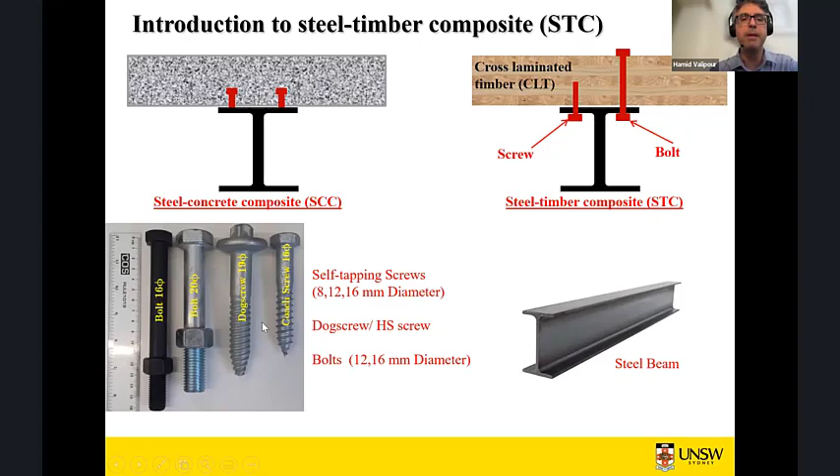Initially, we did some assessment of the advantages or benefits of this steel timber composite system compared to other conventional methods of construction, more specifically reinforced concrete and steel concrete composite.

Apart from that, reduced cost of substrate foundation, particularly if building on soft or problematic soil, is another benefit of this system. The last one is upgrading or rooftop solutions, or adding stories on top of existing buildings, which are becoming more popular and common, especially in densely populated urban areas - another advantage of this steel timber composite system.

We did some analysis on the sustainability achievement of steel timber compared to conventional systems. 5-story, 10-story, and 15-story hypothetical buildings were considered. We designed them as reinforced concrete, as steel concrete composite, and as steel timber, and did a life cycle analysis to see the carbon footprint - the amount of CO2 in kilograms emitted per square meter of each building.

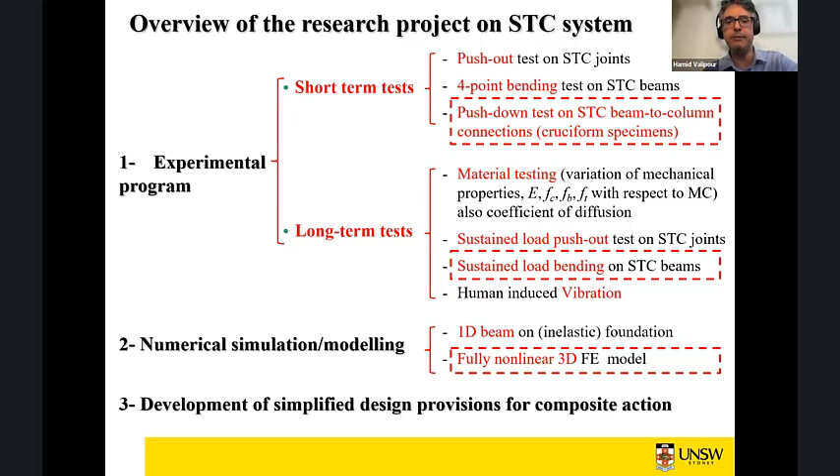Also, we did some analysis on the vibration behavior of these steel timber composite systems to see whether we can satisfy the existing design requirements for conventional residential buildings and offices when it comes to human-induced vibration design requirements. Now, in the next 10 minutes or so, I will take you through each one of these tests, highlight the importance of each one and why we did it, and what the outcomes are and how we can use these results for practical analysis and design of steel timber composite systems.

The first one is what we call the push-out test. So we have a steel profile at the middle, then it's connected to 2 CLT panels on the side. The connection, as I indicated earlier, could be conventional mechanical fasteners like bolts and screws or something else. What that something else is, I can show you an example of other alternatives for a shear connection between timber and steel in the next few minutes.

And then we apply a load, we push this down, and then we measure the load versus relative displacement of these 2 components, timber versus steel, and that's the type of results we get, what we call load versus slip. This would shed some light on the performance of the connections, which have a critical role in design of any composite floors, including steel timber composite floors. Of course, we are interested in stiffness, strength, and also ductility of these connections, especially under extreme loading conditions, when the shear connections are pushed to their limit and beyond.

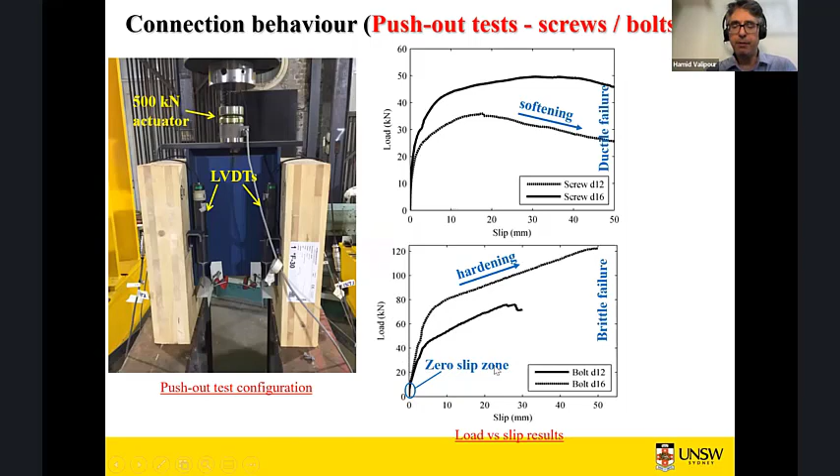In terms of strengths, it's completely opposite - bolts have higher strength than conventional screws, and the screws I'm talking about are conventional coach screws that you can get off the shelf, manufactured from mild steel, 4.6 steel with yield strengths of around 240. In terms of stiffness, again, screws initially have higher stiffness, but bolts have a slightly higher stiffness after the first initial slip. If the bolts could be tightened to mobilize friction, definitely the initial slip would be much smaller.

Again, we did some bending tests, 4-point bending tests, to see how the results stack up when we look at the load versus midspan deflection. So this is a bare steel beam, the dot line, and the solid line is a steel timber composite beam. You can see there is a 50% strength enhancement when we are using coach screws 16 millimeter, 250 millimeter apart, which is quite reasonable. In terms of stiffness, the initial stiffness of this composite system is around 50% higher than the bare steel beam.

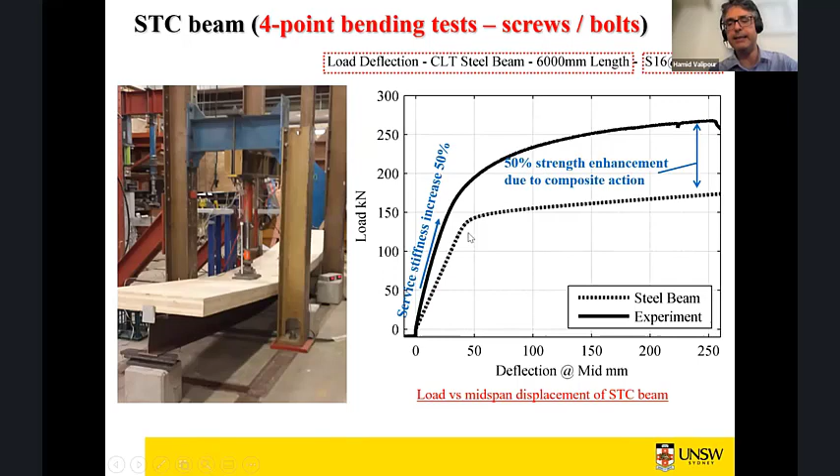This is another type of connection. As I said, one critical factor in design of steel timber composite floors is the stiffness of the shear connectors and the serviceability design requirements related to long-term and short-term deflections. The stiffer the connection, the better the performance of these steel timber composite floors would be. Unfortunately, bolts and screws are not really the best performer when it comes to the shear connection between timber and steel. The idea we had is to replace conventional shear connectors with something which is easier to install, considering all the constraints in the construction side - it could be installed from the top rather than the bottom, which makes it very difficult in real construction.

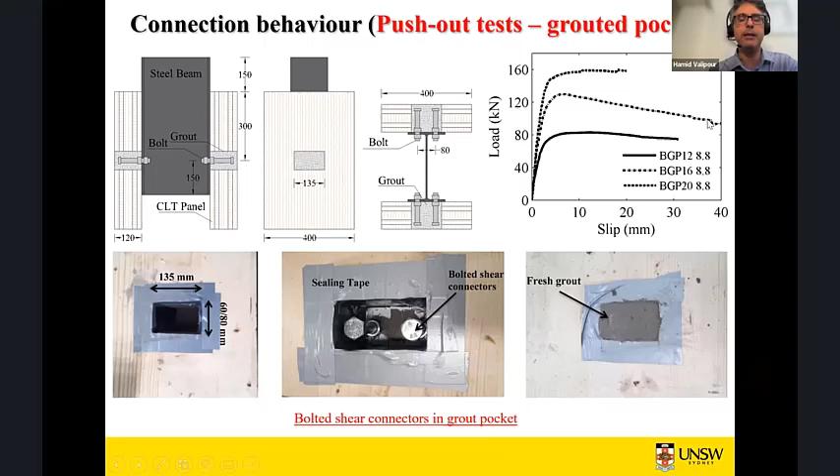And we came up with this idea. So we cut a square hole, and then we installed the stud or bolted shear connectors on top of the flange. We fill these pockets with cementitious grout, and we got very good connections with very good stiffness, as you can see from the initial slope of these graphs, very high strength, as well as very good ductility. So we got a fairly good connection in terms of stiffness, strength, and ductility, which are all important factors from a structural design point of view.

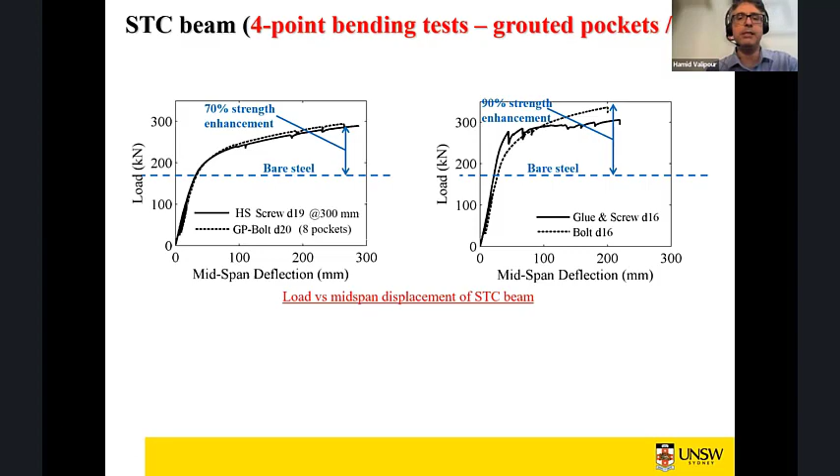Again, we tested a variety of different connections to see how far we can push this system to the limit. The limit, when we have near full composite action, could only be achieved by gluing or using adhesives. When we glued the CLT slab to steel beams and also used coach screws to achieve some level of ductility, the highest strength enhancement we got was close to 90%. That means a bare steel strength could be doubled by developing composite action. We're talking about CLT slabs around 100-120 millimeters thick, and steel beams around 310 UB size. So you can imagine how much strength and stiffness enhancement we can achieve.

The next part was to compare steel-concrete and steel-timber, to see whether steel-timber really performs on par with steel-concrete. That's what we tested, again with an 800 millimeter wide slab. Once we had a reinforced concrete slab, and then a second time we had a CLT slab, both connected to this 310 UB32, and we did the load deflection testing.

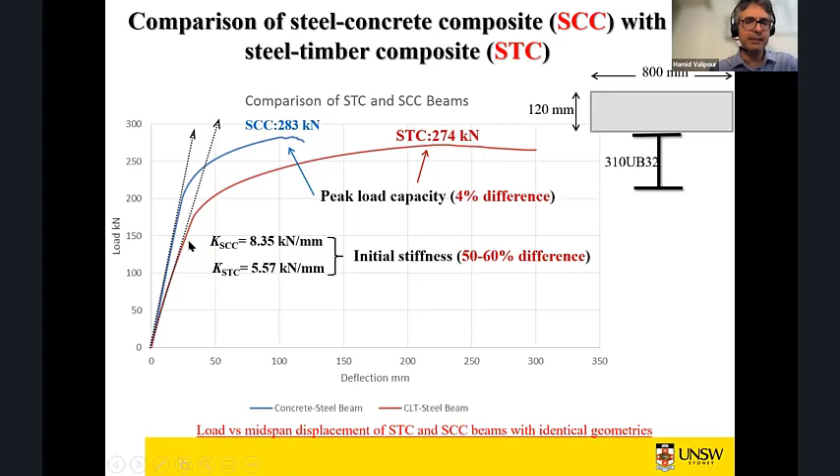We just tested these beams, and these are the results. The red one is basically steel-timber, and the blue one is steel-concrete. You see, in terms of ultimate strength, there is not much difference. In terms of ductility, in fact, steel-timber, interestingly, is more ductile than steel-concrete. In terms of stiffness, due to the lower elastic modulus of timber compared to concrete, steel-timber composite has a slightly lower stiffness - around 50-60% - but still definitely much higher than a bare steel beam.

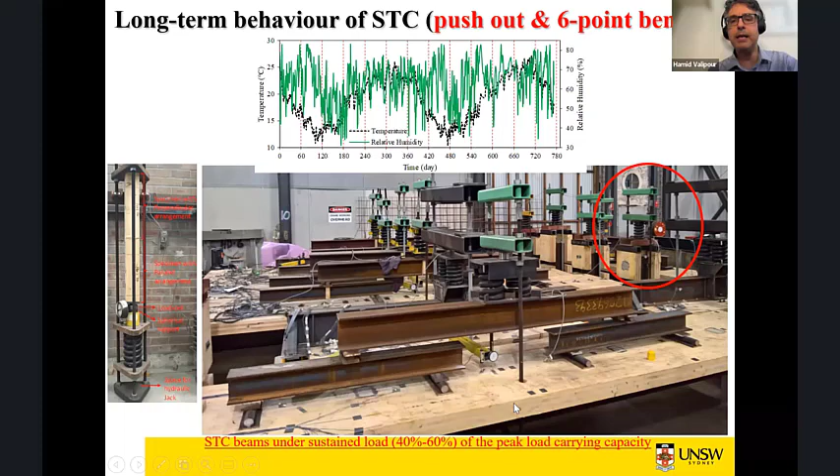These specimens, 6 meters long, were under load for nearly 2 years. We measured the relative humidity in the lab environment, temperature, and from there we measured the midspan deflections and slope, a variety of different parameters measured during the test, and that data was used to evaluate long-term performance. The simple graph we get out of this is something like this: we have midspan deflection, expressed as a percentage of initial deflection, versus time. You can see over time the deflections increase, and these jumps or drops are associated with rainy days or dry days, when the hygromechanical behavior of timber kicks in and affects the deflection measurement.

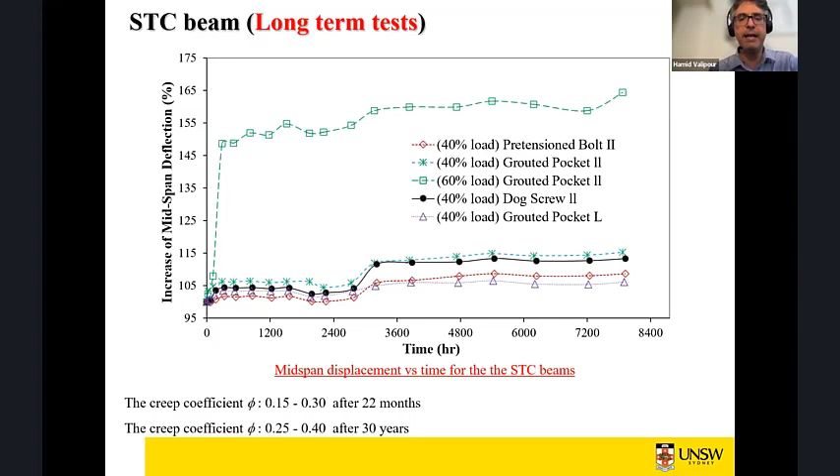To summarize the outcome of long-term deflection after 22 months, the creep coefficient we measured for the 5 beams with a variety of different connections was somewhere between 0.15 to 0.3. When we extrapolated the results by fitting log-normal models and doing computer simulations, the long-term creep coefficient was around 0.25 to 0.4. If we use 0.5, that would more or less take care of long-term deflection, meaning your initial deflection multiplied by 1.5 gives you the value of long-term deflection.

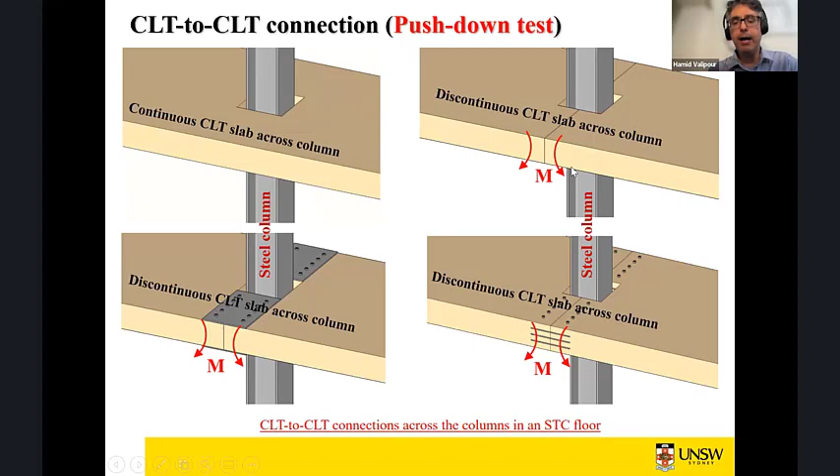If we look at beam-to-column connection behavior, one of the interesting aspects when we have the composite system is to see how continuity of the slab assists in developing hogging bending moments, increasing stiffness at the beam-to-column connection, and accordingly reducing midspan deflections, which assists in satisfying serviceability design requirements. Also, these bending moments provided at the beam-to-column connection zone can be relied on as part of the lateral load resisting system, like a moment resisting frame.

We did what we call a push-down test. You can see what a push-down test looks like. We have a column in the middle, and then we push down these ends of the beam, which we call a subassembly of the beam-to-column connections. And then we can measure the load, the rotation, and a variety of different parameters.

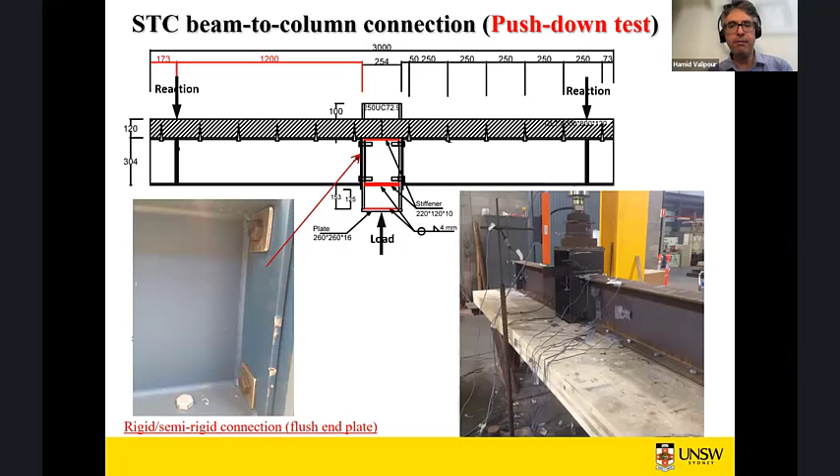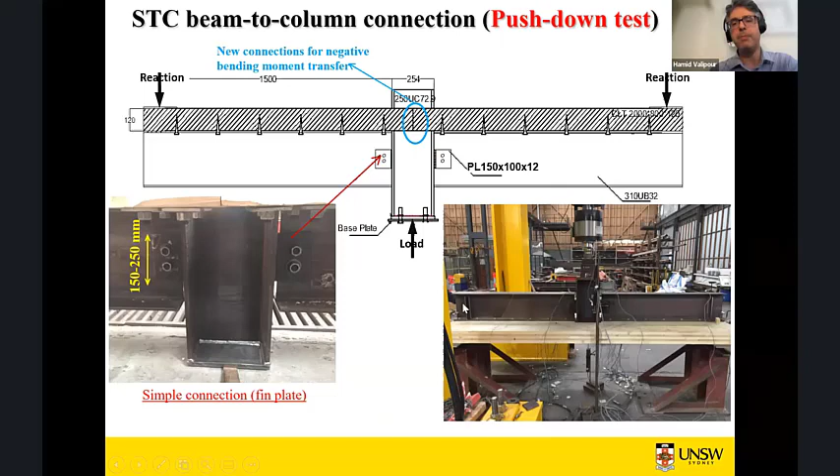From there, we can evaluate the structural performance of beam to column connections. We look at flush end plate, shear tabs, web cleats, a variety of different beam to column connections, and that's the setup we use. Typically, we flip over the whole specimen, apply the load at the middle, and have reactions upward.

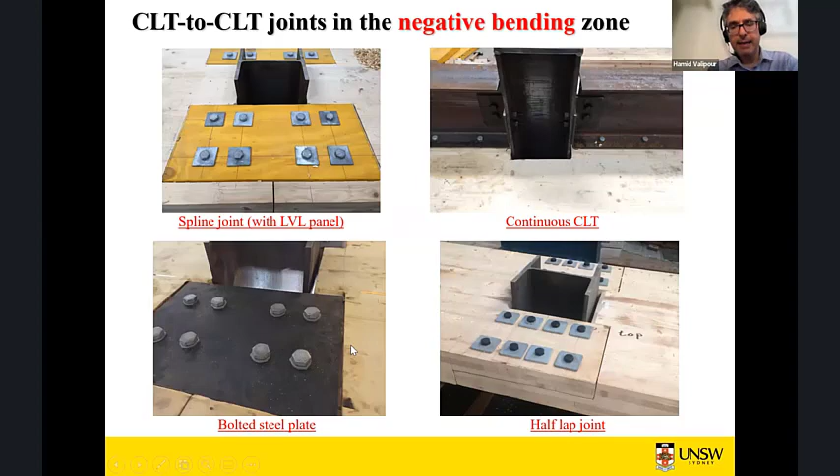In terms of CLT to CLT connections, we try to use some of the connections typically used in industry for mass timber floors, like spline joints with LVL panels, half-lap joints, bolted steel plates, and these types of connections which are easy to implement and construct.

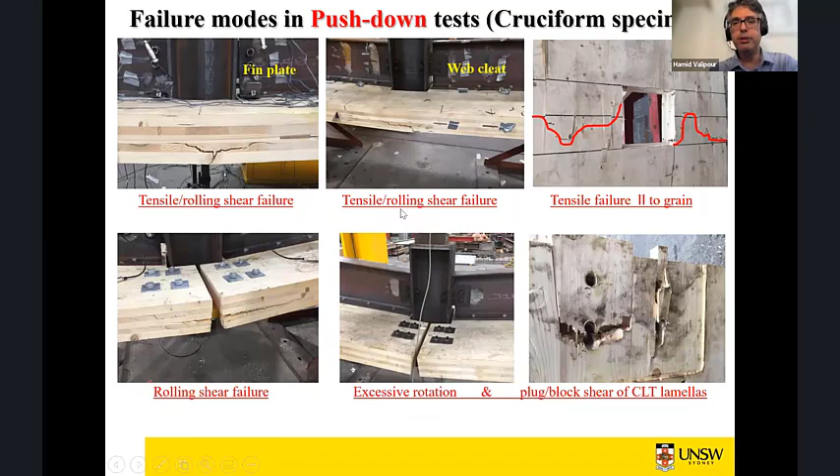These are some of the failure modes you can see, like plug shear, block shear down the bottom on the right. You can see tensile failure, rolling shear failure in the lamellas loaded perpendicular to grain. Again, rolling shear, tensile failure, and a variety of failure happening in CLT slabs.

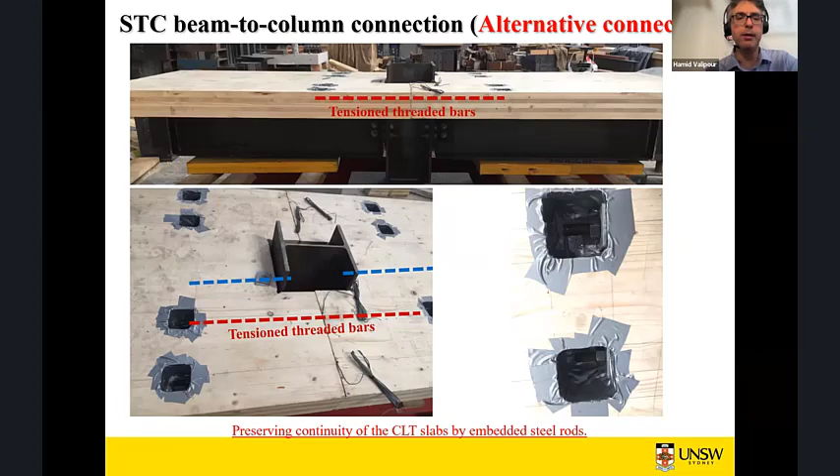We came up with some other alternatives for connecting the CLT to CLT at this location, where the two panels meet each other at the column joints. We use this method, basically embedded threaded rods, and got very good results. We use these shear pockets, filling them with cementitious grout to protect the bolts or mechanical shear connectors from exposure to whatever outside is, including possible fire.

The results we get out of the push-down test are load versus midspan deflections. I want to highlight a few things on this graph. You can see a variety of different connections - the glue CLT plus steel plates. We got this graph which goes all the way up, showing a peak load close to 400 kilonewton. Keep that 400 kilonewton number in mind, and in the next slides we test.

Like steel concrete composite floors with continuous reinforced concrete slab, we got strengths close to 440, which is just 40 kilonewton, or around 10% less than what we get from steel concrete in this case of steel timber composite floors. We tested bare steel beams and compared the results. One thing is the brittle failure when we have glue used for connecting the CLT panels, which is not ideal, and then the load drops and follows pretty much bare steel beam to column connection behavior.

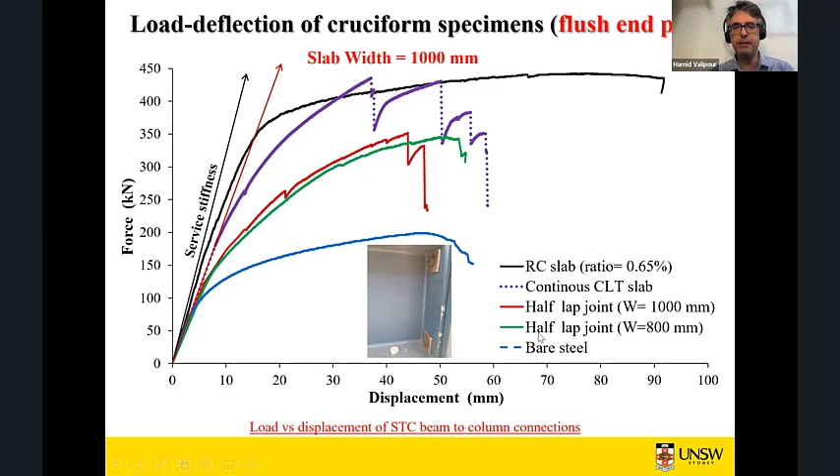Look at the case where we have a steel concrete composite. You see this RC slab here, up here that solid line is basically around 400, 430 kilonewton, which I said is just around 10% more than what we had in the steel timber composite beam to column connections with 2 plates top and bottom on the CLT slab.

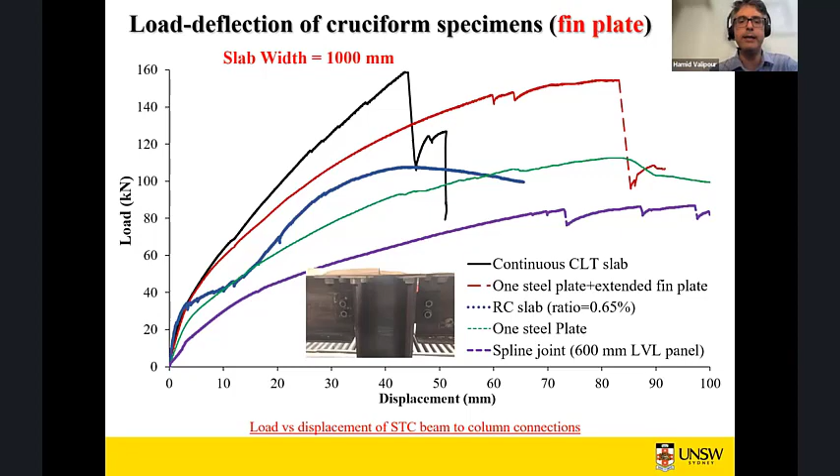Again, the same graphs more or less - the results consistently demonstrate that out of this CLT slab, we could get quite a lot of stiffness as well as strength provided at the beam to column connection zone. And of course, if we can rely on this and take it into account in our design, that would assist us to reduce the size of beams to some extent, and also enhance the lateral load resisting system in terms of stiffness as well as strength against wind, seismic action, etc., when needed.

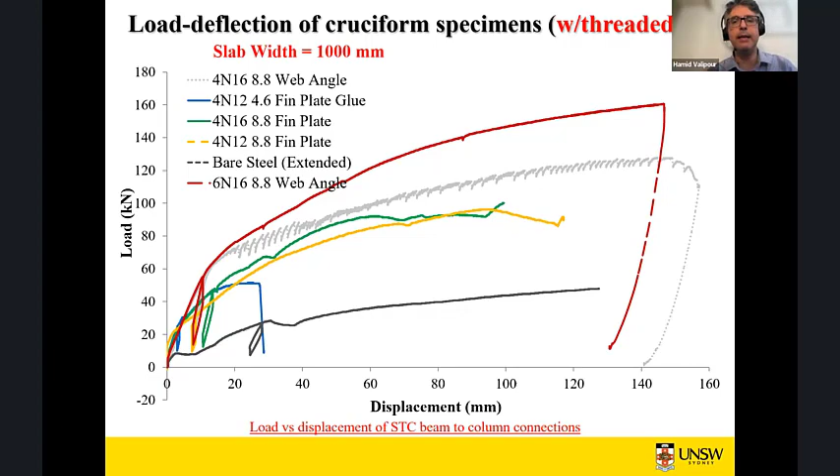These are the results related to that connection with embedded steel bars. Just to conclude, steel timber composite or steel CLT composite is a viable alternative to conventional steel concrete. Gluing is ideal - it provides very high stiffness and strength, but definitely it's not really ductile, and that's the big downside when we want to use glue in this kind of connections.

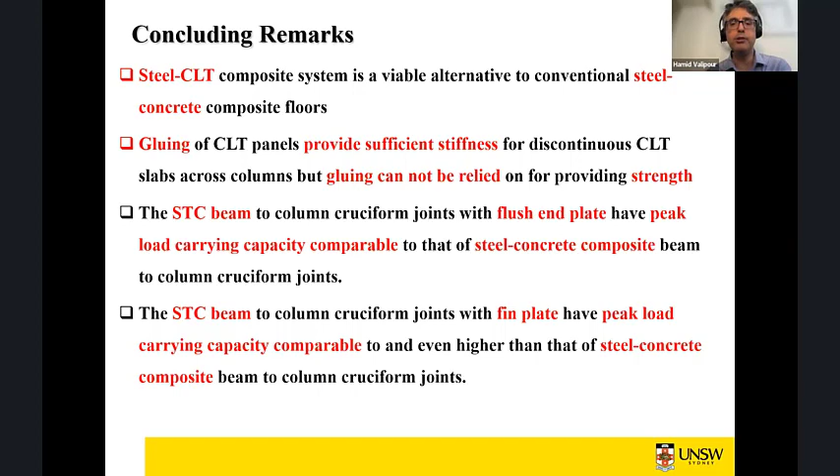All the other conclusions more or less demonstrate that steel timber composite beam to column connections can be basically relied on as part of the lateral load resisting system, and the strength and stiffness provided can be used to have a more efficient design in practice.

The next part of our project, which I'll very briefly provide some background on before going through it, is about modeling. Whenever we do any test, we do a limited number of tests because testing is very expensive, costly, time consuming. Immediately after that, we try to build models - these are models we can use as a predictive tool, to predict the behavior and generate more data that are really reliable.

And it's not just a data fitting exercise - that's what we are interested in when it comes to modeling. That model should capture the failure mode, should capture stiffness, strength, as well as peak and post-peak behavior of the steel timber composite system or any kind of composite timber floors.

And apart from that, from those models, we could get good load deflection diagrams, reasonably accurate ones, or moment rotation diagrams.

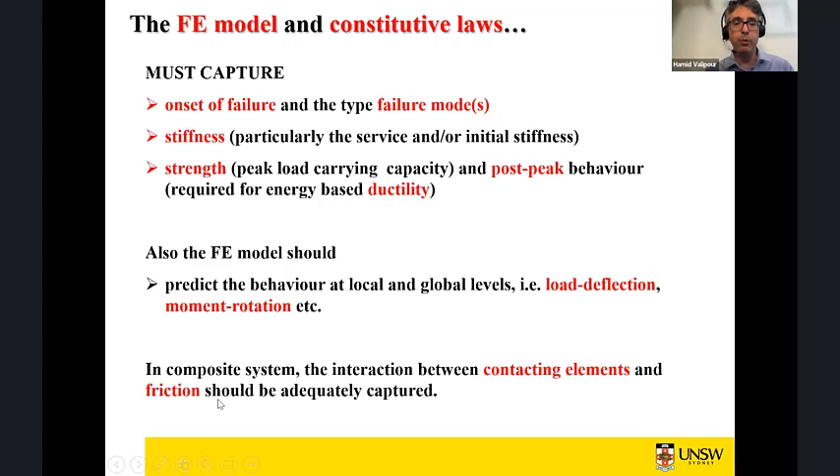One of the challenges always in this kind of modeling we need to keep in mind is the contact and interaction between different components, especially the effect of friction, which should be taken into account if you want a good model. We developed a model that involved quite some level of derivation and rigorous mathematical implementation in a computer code, in Abaqus specifically.

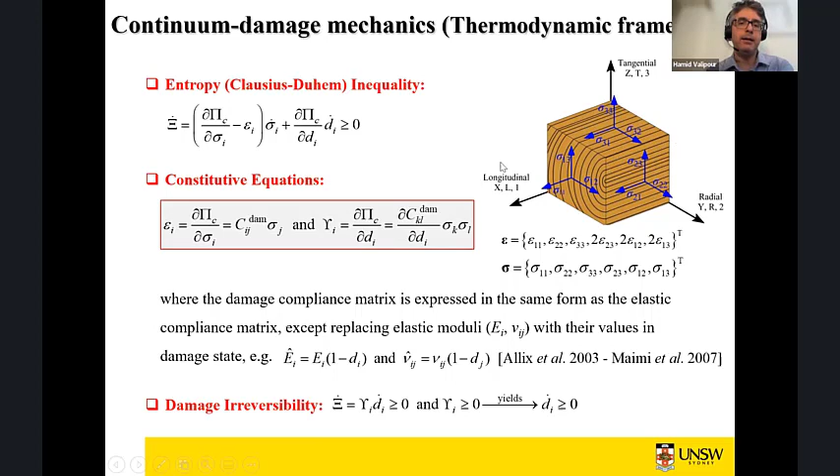In this case, we recognize an anisotropic behavior of timber in different directions, and we try to implement that. This is typical uniaxial material behavior we plug into our model.

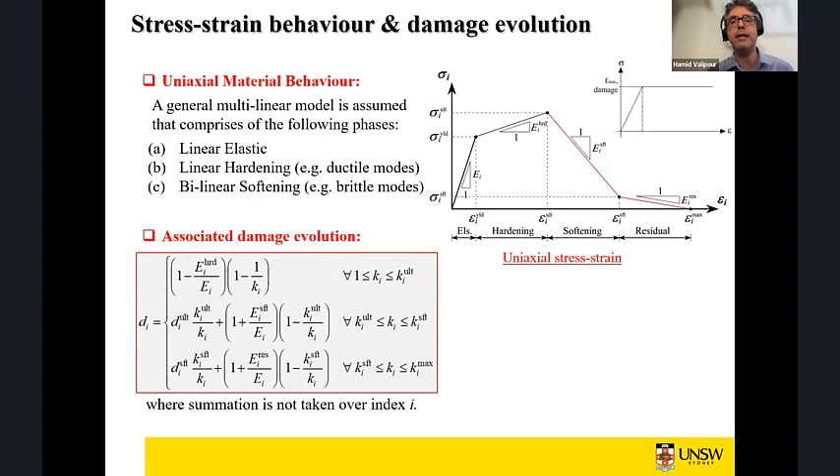So we implemented this piecewise linear model to ensure that the results could be adjusted when needed, or we can use it to fit into different kinds of behavior, tension, compression, whatever is needed.

So to do the modeling of timber and steel timber specifically, we need elastic modulus in 3 directions, we need Poisson ratio, we need shear modulus.

And apart from that, we need compressive strengths, tensile strengths in different directions, parallel to grain, perpendicular to grain. We need shear strengths, we need rolling shear strengths.

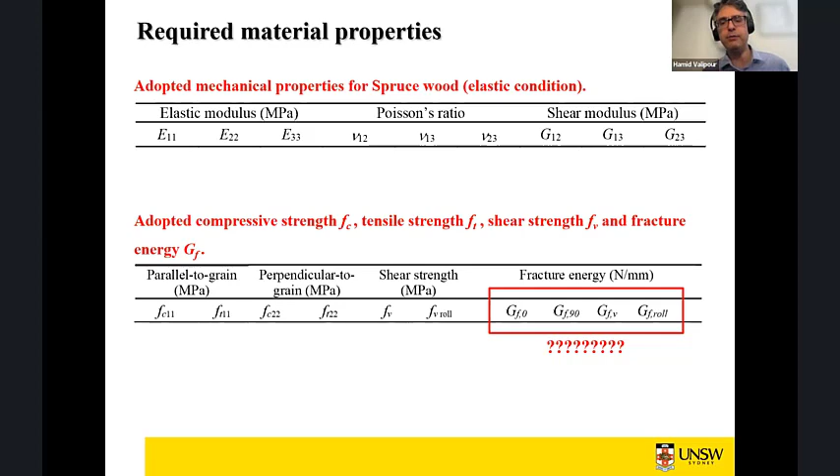One parameter which we always have a challenge to establish is the fracture energy. Recently, there have been quite a few theses coming out, mostly done in Europe, in Austria and in Sweden. They try to measure the fracture energy, which provides for us a very good benchmark when we want to do this kind of modeling.

We did a variety of modeling. Just one thing I would like to highlight towards the end of my presentation is the importance of modeling and what challenges, in fact, we have when we want to do this kind of modeling exercise.

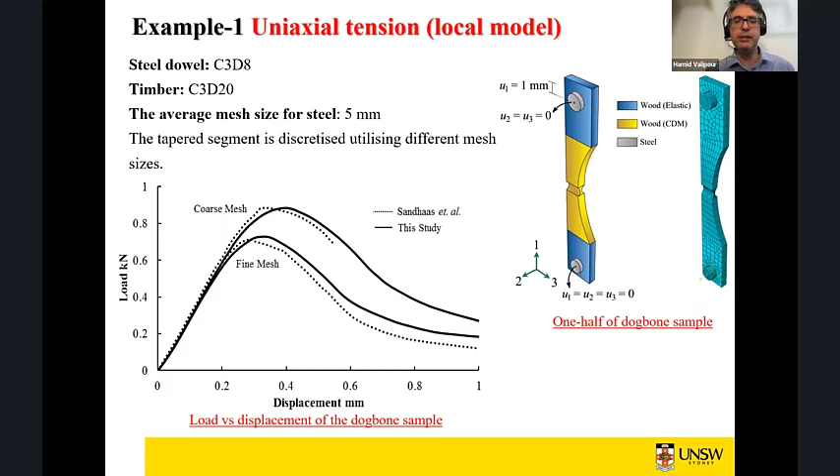And it's not just specifically this particular example or this particular type of sample. Any kind of timber structure subjected to tension, or to a combination of tension and shear, more or less you should expect the same thing. So we try to resolve this by coming up with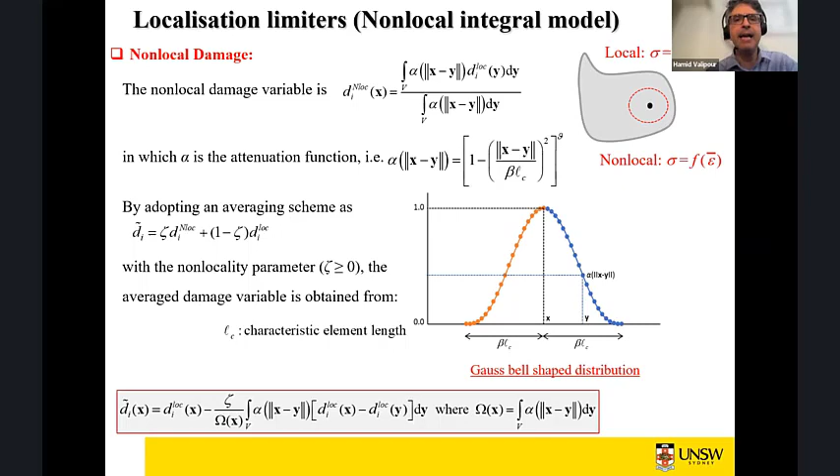what we call a localization limiter. It means that it prevents the model from having the cracks localized in a narrow band. And that's in fact the reason for that sensitivity you see.

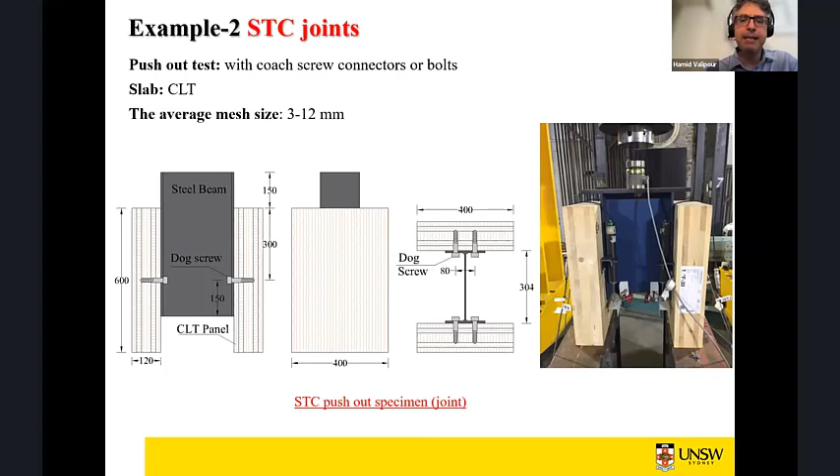We tried again to do further modeling in terms of capturing the load slips of STC connections, like this one, under pushout. So this is the type of model we did.

One thing again I want to highlight is the importance of the contact and how you have to model this. A very good reference to that would be a thesis done at Vienna Institute of Technology by Michael Dorn.

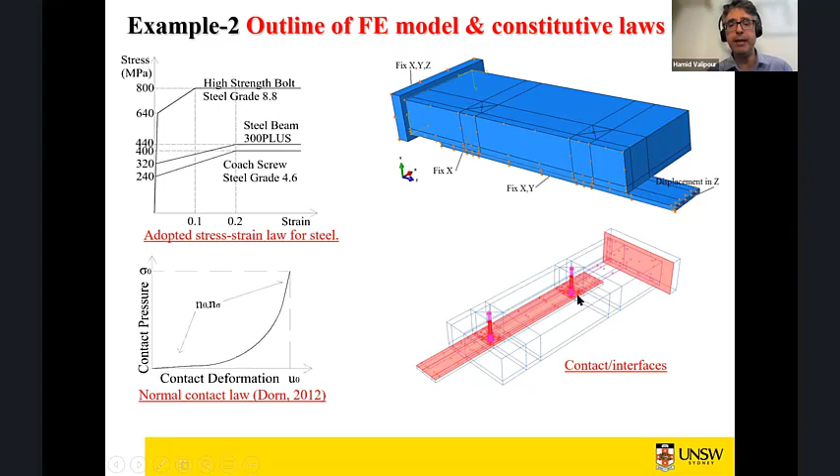And he has done extensive work on different interfaces between mechanical connections and timber. You can use this as a reference to basically introduce a proper contact at these interfaces and get good results without tweaking or fiddling around with your model, and use it for predicting the results.

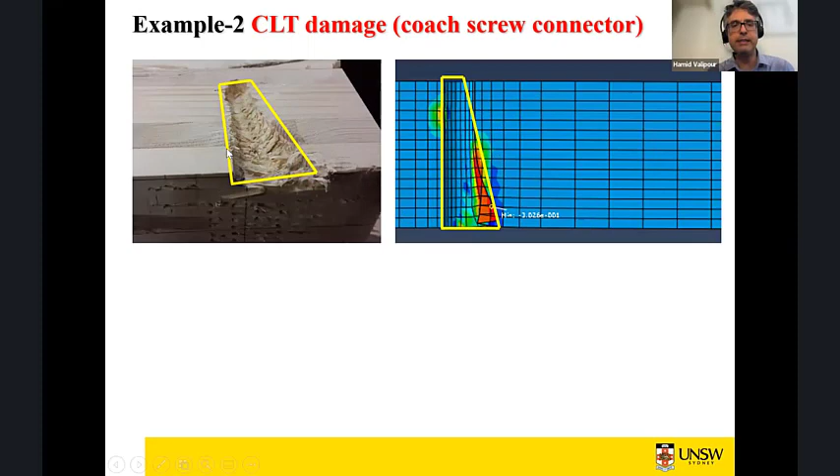This is one example. So you see the finite element model prediction on the right, the extent of the damage, versus the test data, extent of the damage, on the left. Again, these are the type of deflections or deformations you see in the screws, very similar in terms of the number of plastic hinges, quite consistent with the test.

In terms of load versus slip, again, you see there are quite consistencies. And you see the Eurocode predictions are completely, of course, conservative when we apply them for this steel timber composite connection.

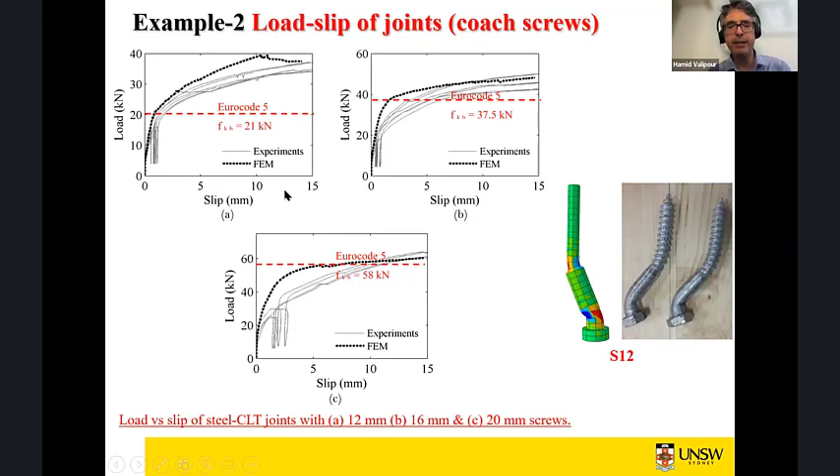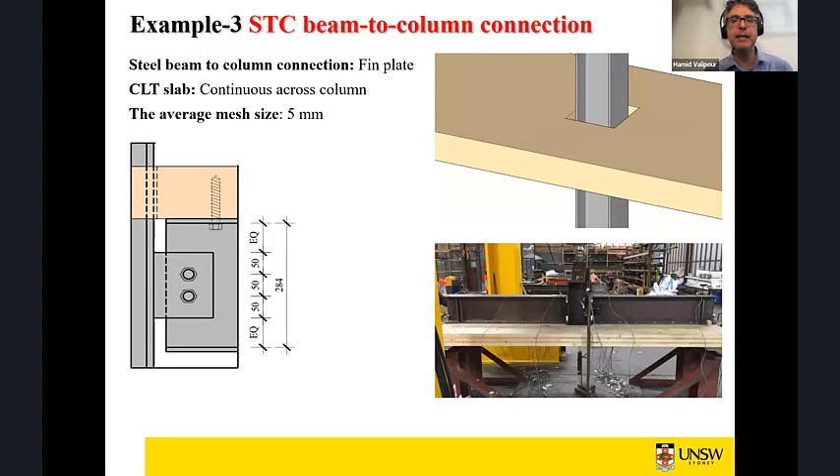The next stage was basically modeling the beam to column connections. Like what I said, whatever test we do, immediately after that, we use this modeling exercise to expand the library of our test data rather than spending a hefty amount of our funding on just testing. We do this exercise and validate it against the test data, and from there we use it for further assessment or evaluation of any system, including the steel timber composite system.

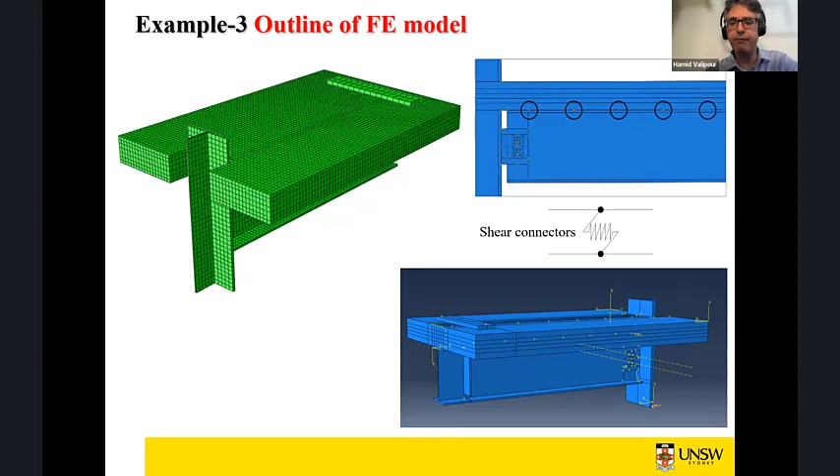This is another example. You see the beam to column connections. We just consider the symmetry of the structure to reduce the size of the model and make it more efficient from a computational point of view. And we analyze the model.

Again, I just want to highlight the importance of mesh sensitivity. You need to keep an eye on this.

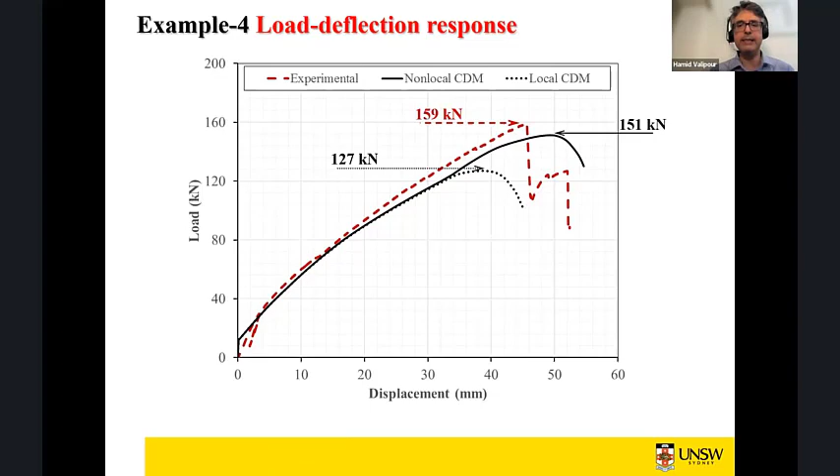Likewise, when we look at the load displacement, you see the peak load from the experiments. The dashed red line is 159. If we use that non-local model with localization limiter, we get a peak load of 151. If you use a local model, you get 127 kilonewton. And you see there is a difference. These are what we really care about, because we need to make our predictions as precise as possible. Otherwise we can't fully exploit all the advantages of any innovative structural system.

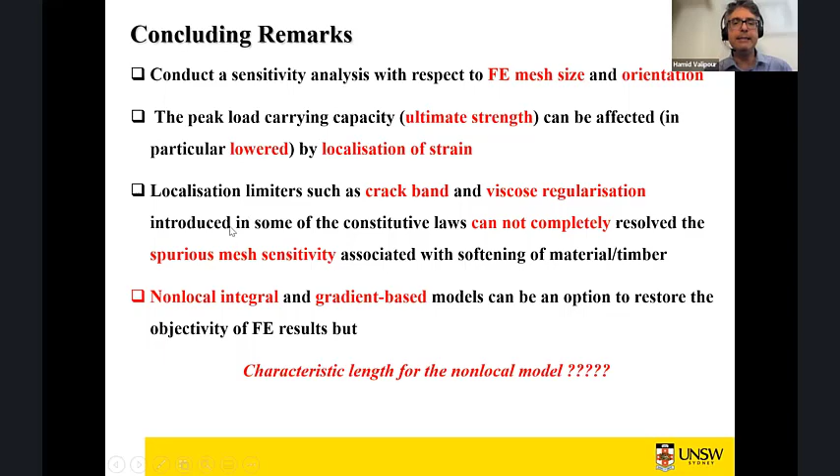In the very last slide, I would like to highlight again the importance of mesh sensitivity. If you're doing this kind of modeling exercise, always remember you need to do a reliable mesh sensitivity analysis to demonstrate the robustness of the results. And if the results are not robust, you definitely need to use localization limiters to get good and reliable predictions.

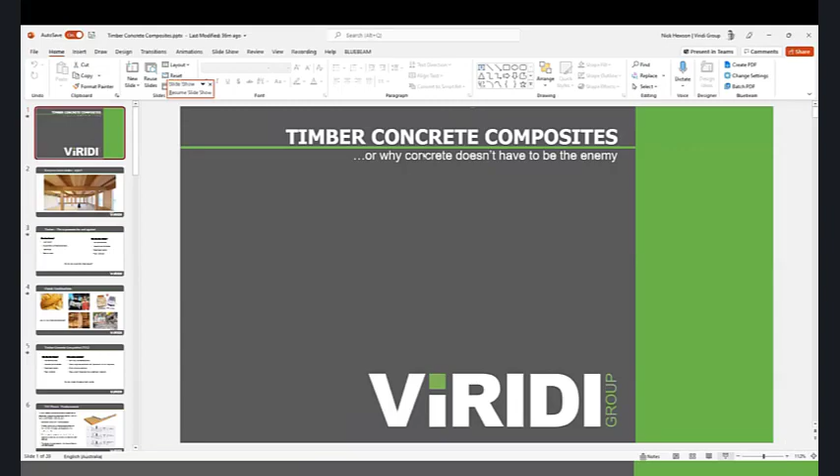I wanted to talk today about mass timber concrete composites, or basically why concrete doesn't have to be the enemy. There seems to be a feeling in industry that concrete is somehow the big bad enemy of timber. I want to show you today why they can work together. But everyone's here today because we all love timber. That's why we log on to Wood Solutions webinars.

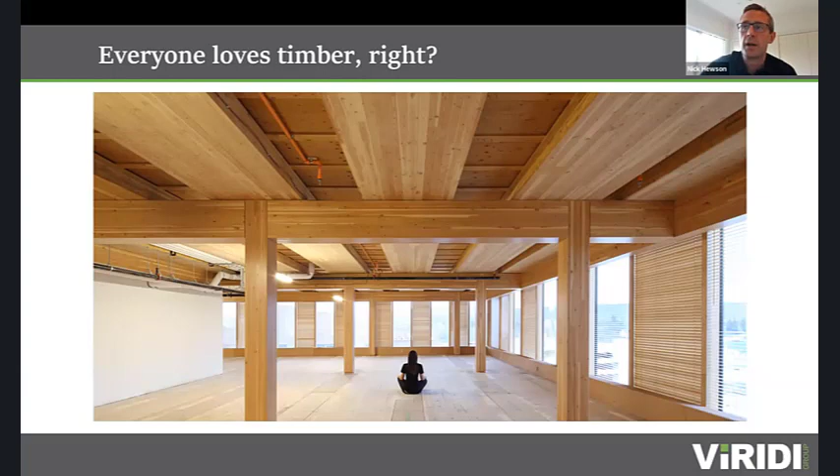We're all converts. We all know very well the benefits of it. I've worked in the industry for a number of years, and advantages such as lightweight material, sustainability, aesthetics, and speed of install are called up time and time again as benefits of timber construction.

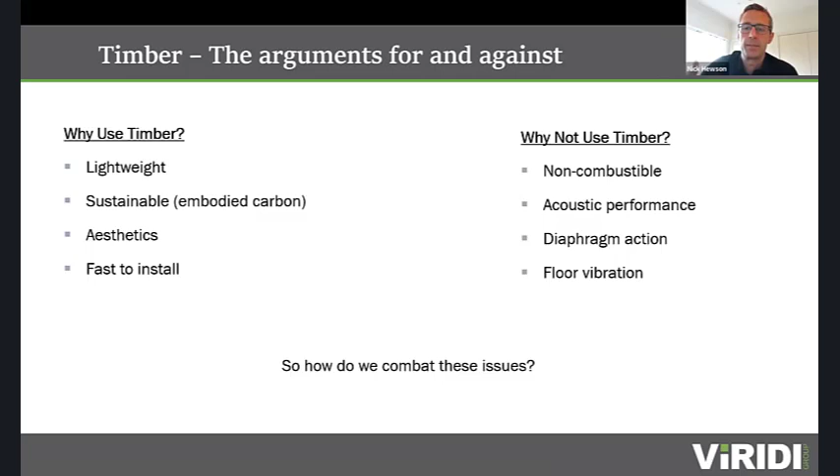But sitting on the other side of the fence, there are also a lot of drawbacks to timber, or challenges. Combustibility is one of the most commonly raised ones. Acoustic performance, with timber being relatively lightweight. The ability to generate large diaphragm actions within the structure, or the lightweight nature of the floor, works against timber, working against high dynamic performance.

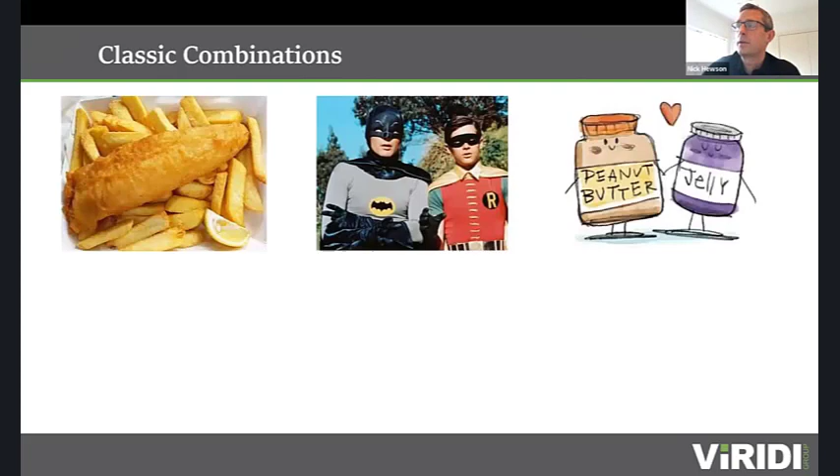So what might we do to combat these? We look at classic combinations, fish and chips, Batman and Robin, or if you're American, peanut butter and jelly, though I never got that one. So why can't we use timber and concrete together more? Looking back at my list of why not to use timber, those four top reasons that are brought up time and again by people looking to better understand the system.

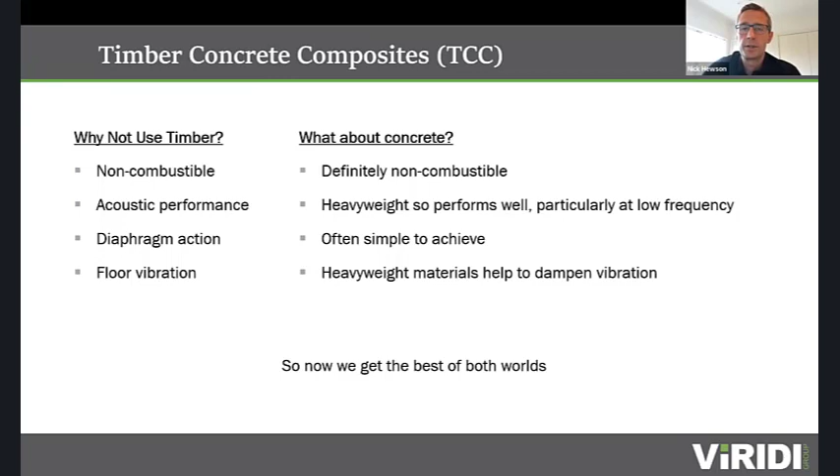When we look at concrete, it pretty well combats all of those. It's definitely non-combustible. It's much more heavyweight construction than timber, so it performs a lot better acoustically. It has an easy, natural diaphragm action through the slab, and being heavyweight it can also help dampen vibration. So bringing those two materials together, we can generate a composite material that performs much better than the sum of its parts.

So timber concrete composites, or TCC floors. Hamid's already been through this in a lot of detail, so I'm not going to dwell on this now, but in a basic sense, concrete works really well in compression, timber works well in tension, and will effectively replace the tension steel in a traditional slab. The key consideration for all these systems is how do you join the two together? The better the connection between those, the more effective the floor system is. Hamid's presentation showed some different options for those. So that's really the key design parameter when you're considering TCC floors.

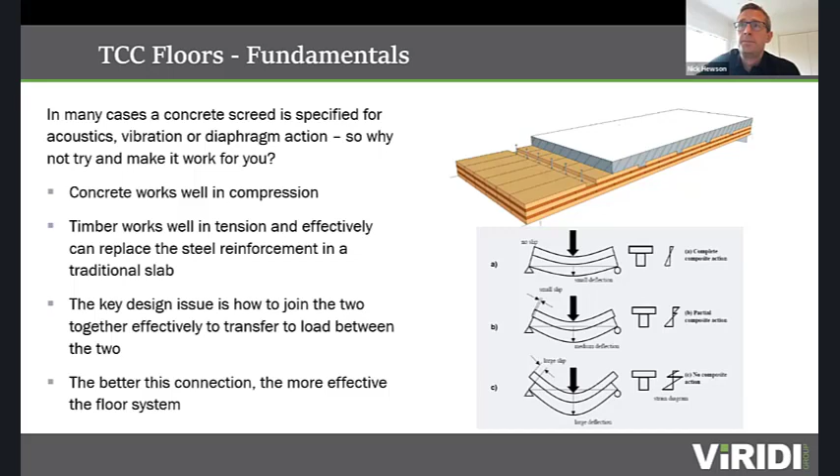My own journey into TCC floors started with one of the earlier projects I worked on in Australia, the Melbourne University Faculty of Architecture, which won the Timber Design Awards. What people don't realize is that there was originally proposed to be a TCC floor over all the upper levels, with a CLT soffit and a large concrete topping over the whole system. That was largely driven by some of the enormous diaphragm forces generated within the building with the atriums and some large cantilever sections.

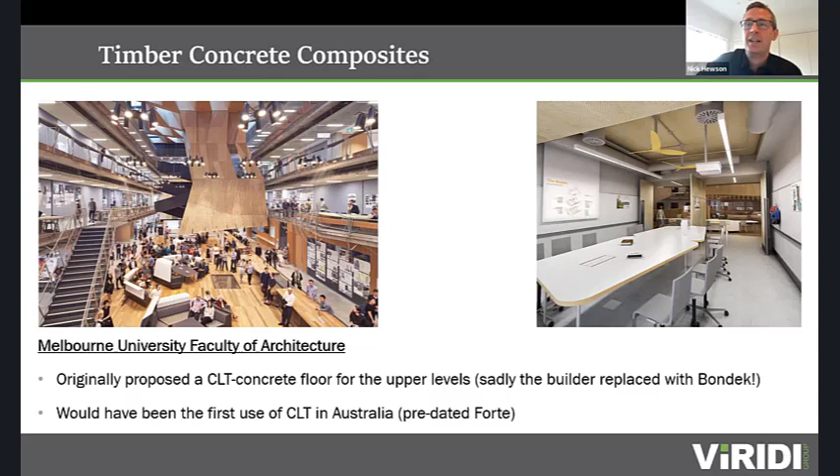We needed the concrete for acoustics as well, so why not combine the two materials and get a better performing system? Sadly, the builder replaced it with Bondek and plasterboard, which was very much what was happening in the industry at the time.

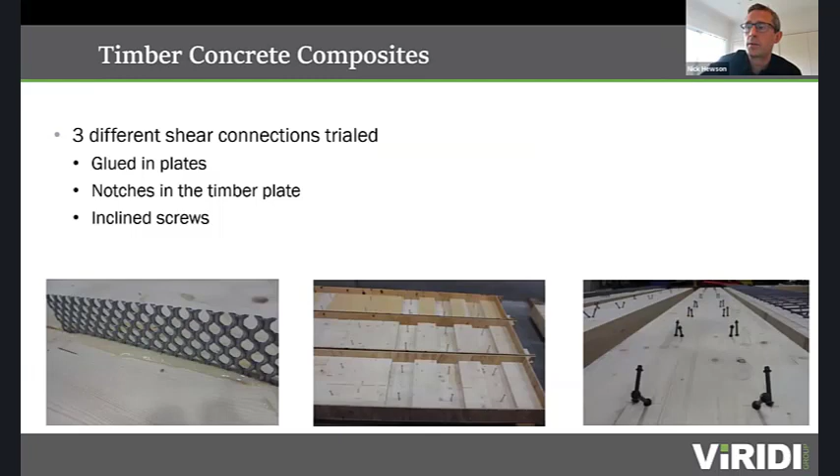But what we did do as part of the university's design was trial a number of different connection systems with full scale tests, looking at CLT concrete composites. The methods we trialed were glued-in mesh plates, routing notches into the CLT, or inclined screws. Both the mesh plates and the screws are proprietary, whereas the notches were based on design guidance that was already available. We tested them all, and they performed exceptionally well.

The screws and plates had very, very high ductility, with significant reserve strength after failure of the composite connection. The notch test had an astonishing amount of strength and performance, but slightly less ductile failure, which is something we would propose to improve through further testing if the floor had gone ahead. But all of them significantly exceeded the service design capacity of the floor.

So this was my first experience of TCC floors, and I think what was clear to me was that they actually worked incredibly well, and they really harnessed the benefit and performance of both materials.

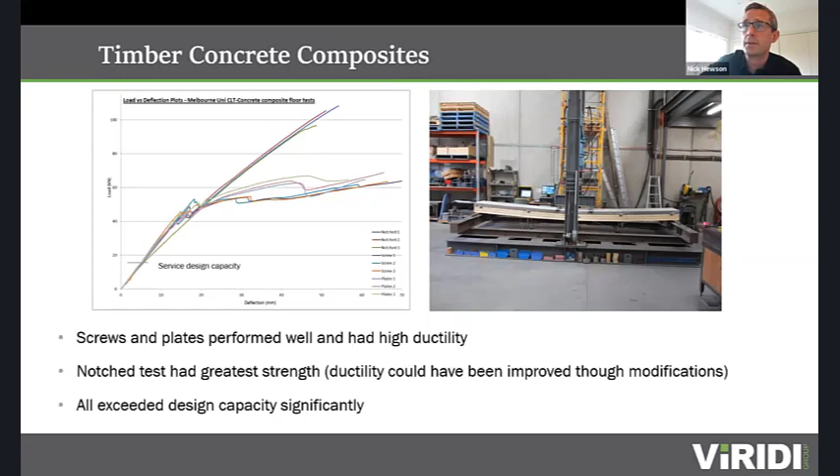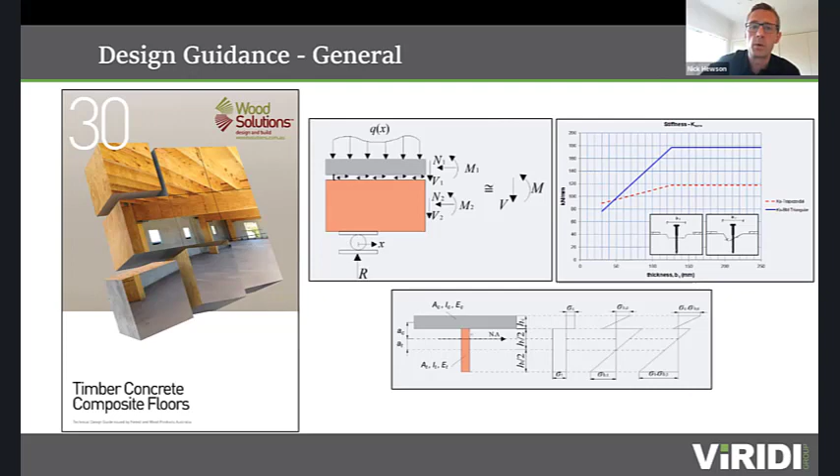When it comes to designing them, I think there's probably a lot more information out there than people realize. I don't know if there's a virtual show of hands for how many people knew that Wood Solutions Design Guide 30 is actually based all around timber concrete composite floors. It's based on the old Xpan research from several years ago, where a set of universities and research institutions from across Australia and New Zealand got together and did research around timber structures, and TCC floors is one of them. So for any structural engineers looking for design guidance, calculations, nice graphs and stress plots, I highly recommend you download this and take a look, because it walks you through the fundamentals very carefully.

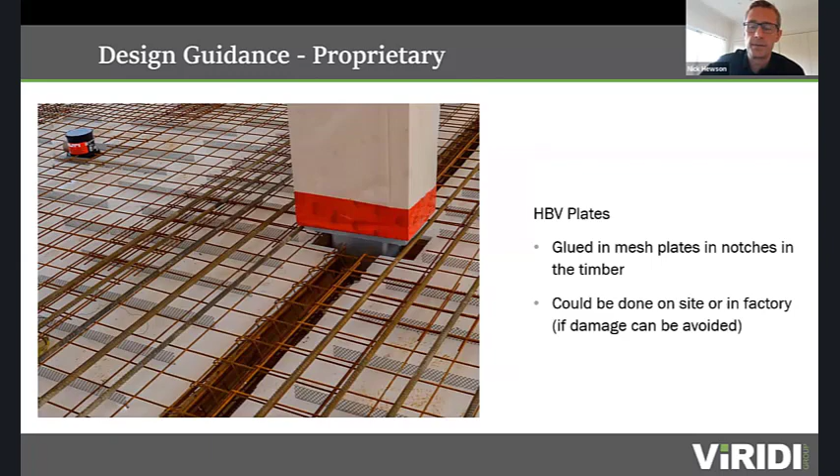The other option, similar to the one we tested at Melbourne Uni, is HBV plates. These could either be done on site or in the factory. They are slightly flexible and flimsy, so if you were to do them off site, you'd need to look after them carefully and make sure your reo is up on bar chairs or something to stop them getting crushed. But again, these work very well, and there's plenty of proprietary design guidance on these.

Another one I've not seen used before is a system by Würth, a big German screw manufacturer, which is a pre- or post-installed screw system. Some of the images show this shear key being put down on the floor prior to casting a slab. On the left-hand side, they're actually craning in precast planks and fixing these post. So there's potential to use these in an entirely dry floor system, if that was something that was a benefit for the particular project.

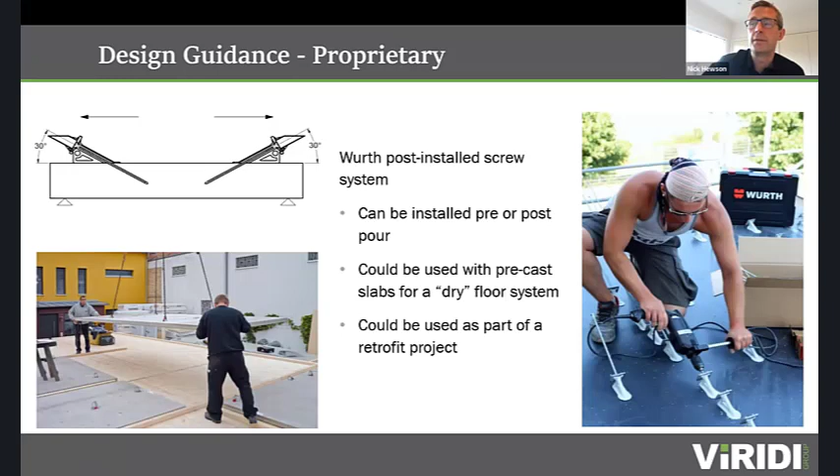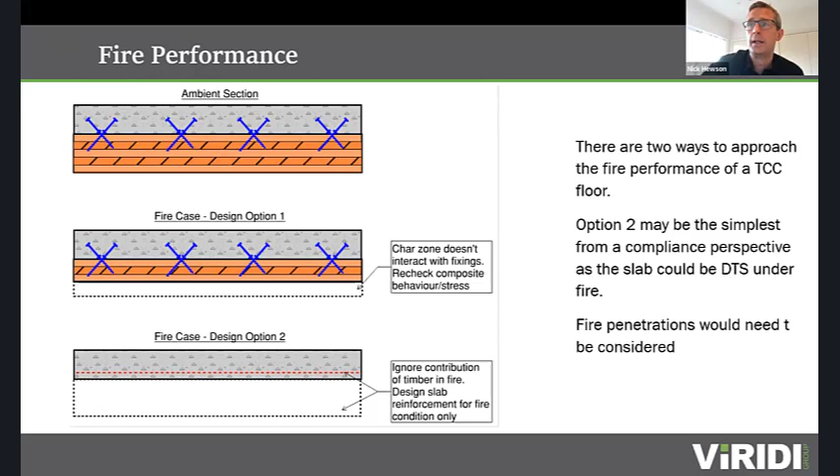Quick word on fire performance. There are two methodologies proposed for designing these. One would be to ensure you've got a sufficient char zone that doesn't interact with the fixings, then recheck the composite behavior and stresses across that section with the reduced properties, and demonstrate compliance through that. The second option, which may be simpler but not as cost effective, would be to completely ignore the contribution of the timber in the fire and design the slab reinforcement for the fire condition only. That might be easier from a compliance point of view, as you could treat it as deemed to satisfy, but it's something we need to work through on a project by project basis.

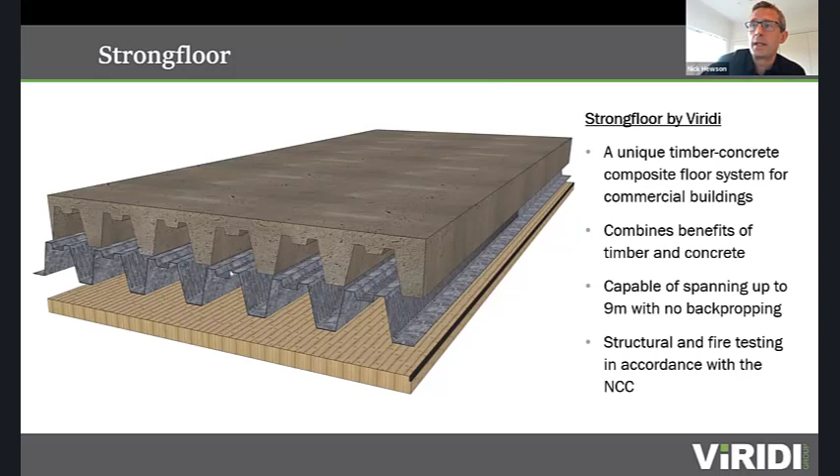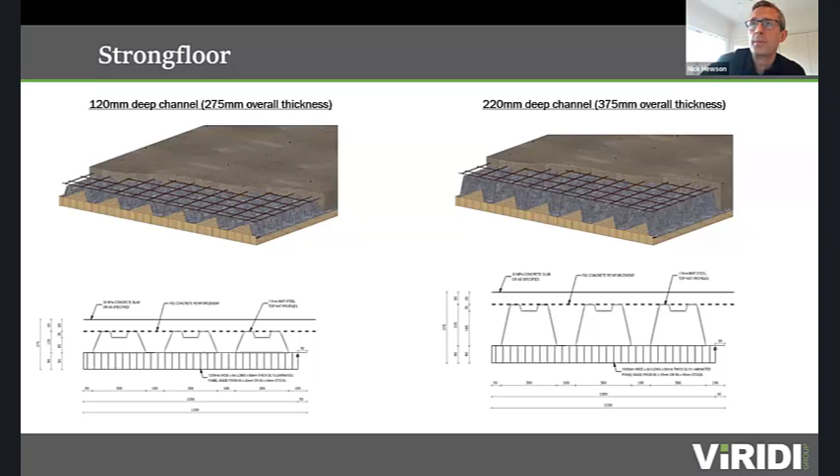Combining the benefits of all those systems, but as a piece of permanent formwork, the system can span up to 9 meters. There are two different options depending on the channel height, and the deeper one, at 375mm overall floor thickness, can span 9 meters unpropped in the construction case. You cast the concrete and end up with a very high performing floor system. We've been working with various partners, and we're just about to start manufacture on the first project this week, so it's proving to be a really high performing system.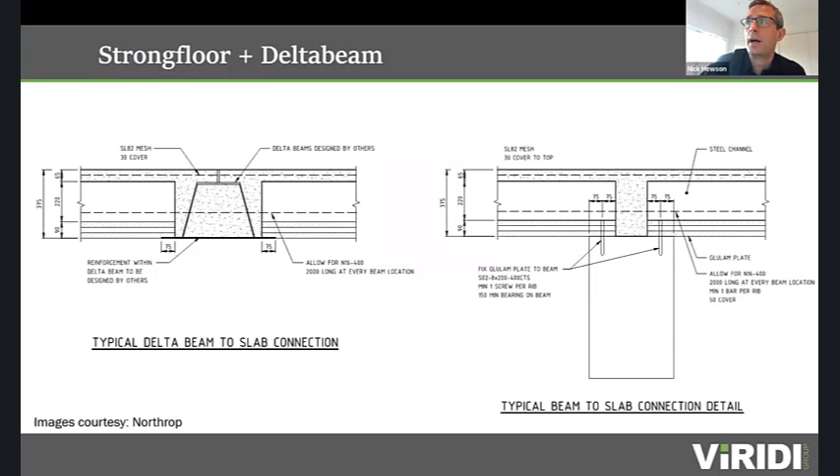We've been working together with Delta Beam, which is a permanent steel formwork, available from a company called Peikko. Highly recommend you check them out. The product itself is a hollow trapezoidal steel beam, with the idea that the strong floor sits on the bottom flange, and then the whole thing's all cast in together. So looking at the picture before, you end up with a much more open soffit. You don't end up with all the beams to coordinate with or penetrate services through, which can save a lot of cost, and could save height off the building as well.

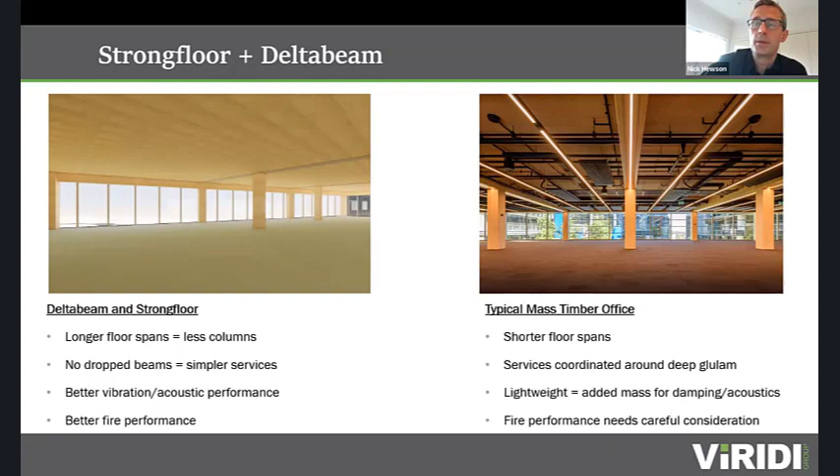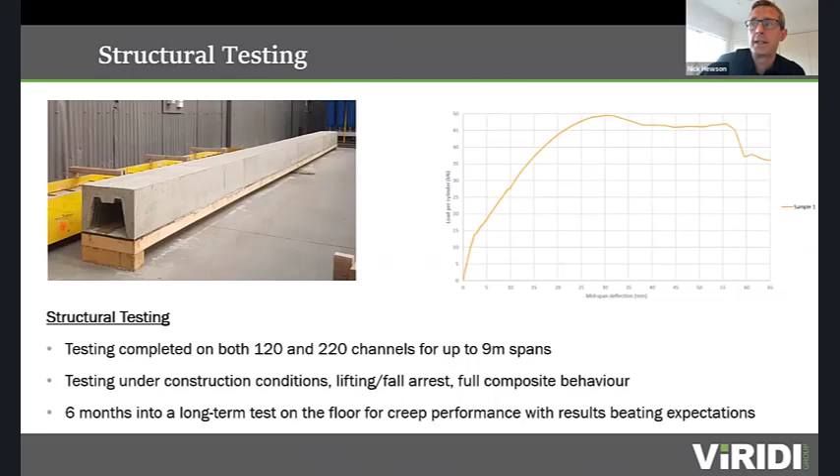We're certainly seeing some interest in projects using these systems together. We've been working through structural testing on both channel systems. We're 6 months into a long-term test of the floor, looking at creep performance, with the results significantly exceeding expectations. We've tested lifting and fall arrest, we've tested construction conditions, we've tested in-service conditions. The floor system is going into its first project imminently, and we're already working on the design of the next few to come.

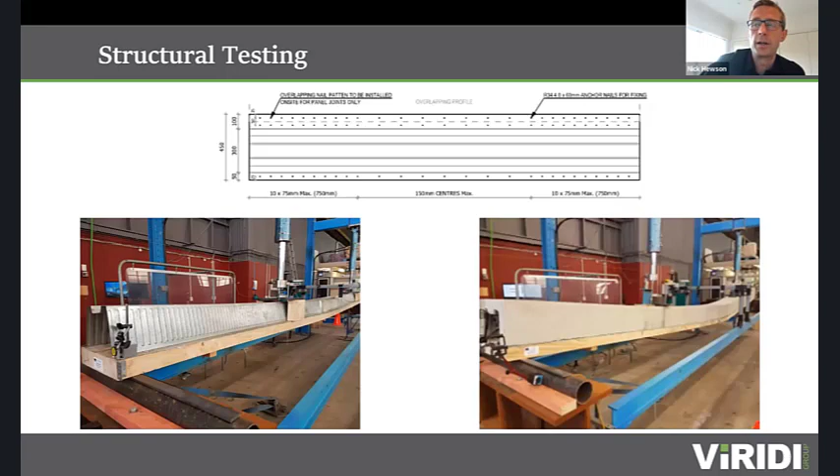The fire compliance aspect of it has been another area we've concentrated on. We've done a lot of testing on the panels themselves, as well as with services penetrations through, and we can achieve up to a 120-minute FRL with this system.

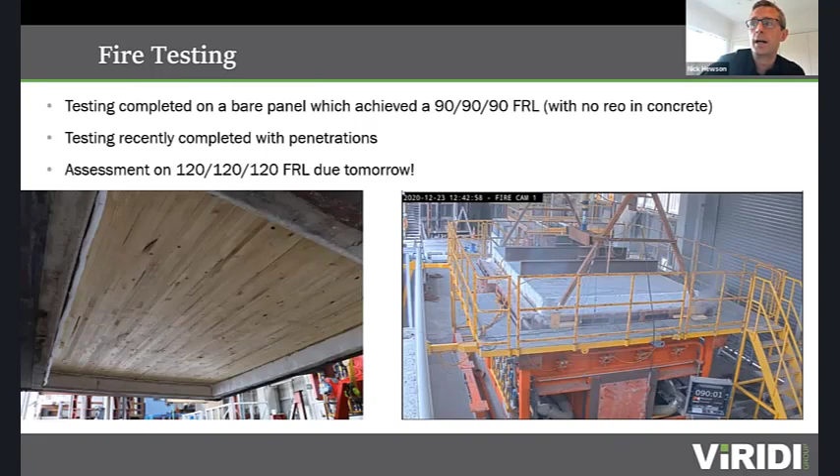For those who follow me on LinkedIn, you'll have seen we recently completed some acoustic testing a week or two ago, again with excellent performance of the floor system. One of the relative Achilles heels of timber floors is their lightweight nature, and acoustic performance is very strongly related to weight and density. Particularly at low frequency sound, timber struggles, so we have to add additional materials to your average CLT floor, whether that's screed, FC sheet, or access floors. These are all relatively expensive, but a TCC floor can pretty well achieve compliance solutions for residential and commercial buildings without significant build-ups on top.

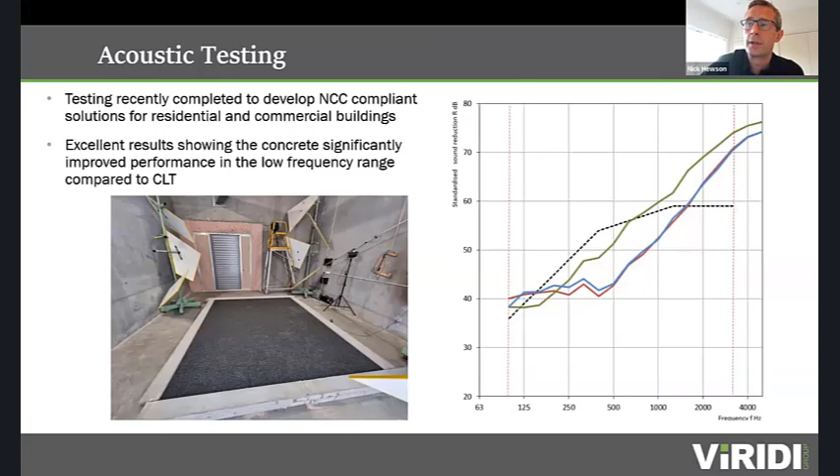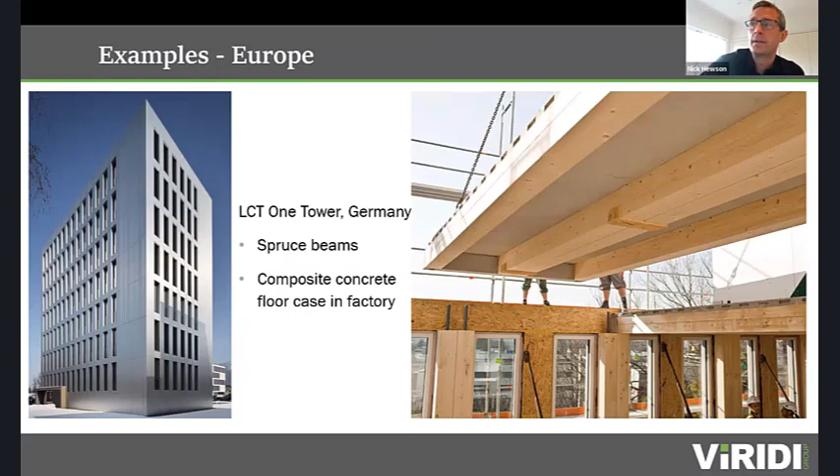So just a few examples, I realize we're getting close to the end of the hour so I'll try to speed through these. These are some examples from around the world: the Lifecycle 1 tower in Germany, using precast concrete and glulam beams for the floor solution.

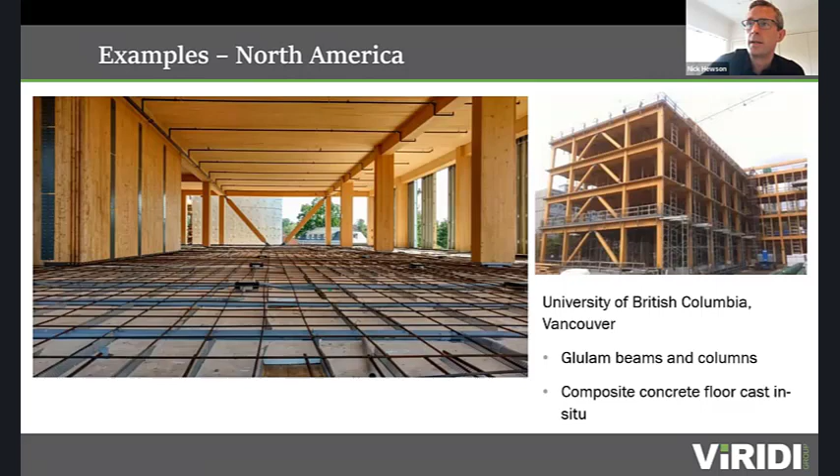The University of British Columbia Earth Sciences building, this one was all cast in situ. Again, we're seeing a lot of use over in North America and Europe. TCC floors seem to be a lot more accepted over there, I think due to requirements around acoustics and vibration being a little bit more stringent on the continent. They seem to be a larger part of the market over there.

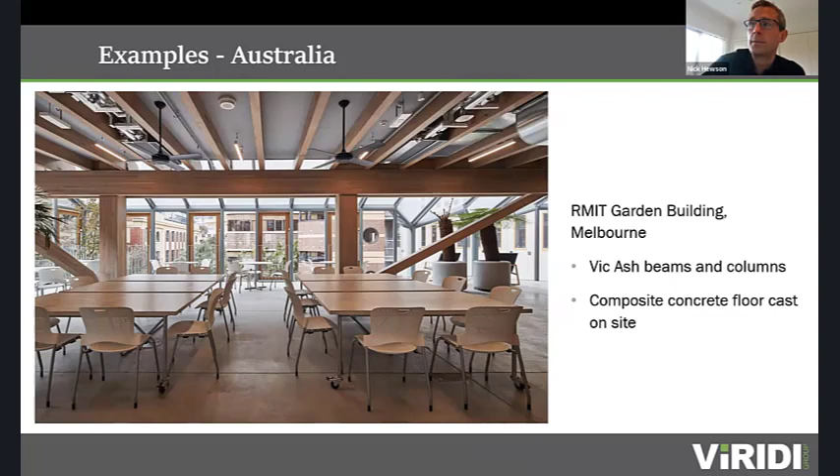There are some examples around in Australia, and I picked this one because it's one of my favourites, a beautiful building in Melbourne, the RMIT Garden Building, with Vic ash beams and columns and a composite concrete slab over the top.

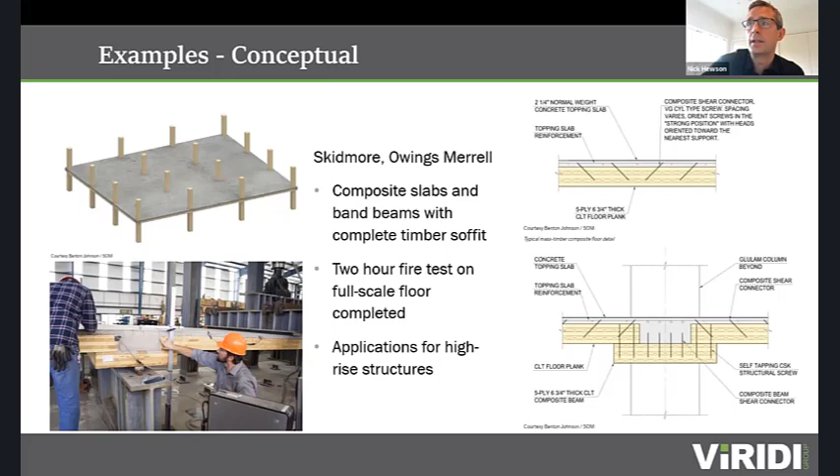For those following the arms race in tall timber, there's more and more consideration of hybrids, hybrid materials, hybrid structures and systems. This is the SOM version of timber concrete composite floor with composite slabs and reinforced beam sections. They recently tested these for over a 2-hour fire test on a full scale floor. I think we're going to see more and more TCC floors as we start to push buildings higher, as we need a high level of robustness and performance.

The benefits that TCC can bring will be a strong card to play. So when might you consider using a TCC floor over conventional mass timber or even conventional concrete?

If you need a heavyweight screed or finishes on top of your CLT floor for acoustics, why not consider trying to mobilize that structurally and increase performance while reducing materials? If you've got a really large open plan building with large diaphragm loads, TCC floors will work really well. Sensitive floor uses like laboratories or medical facilities with high vibration performance requirements will also work well with TCC. And if you've got a conservative client who likes the idea of timber but isn't quite ready to give up concrete, TCC could be a nice gateway drug into mass timber.

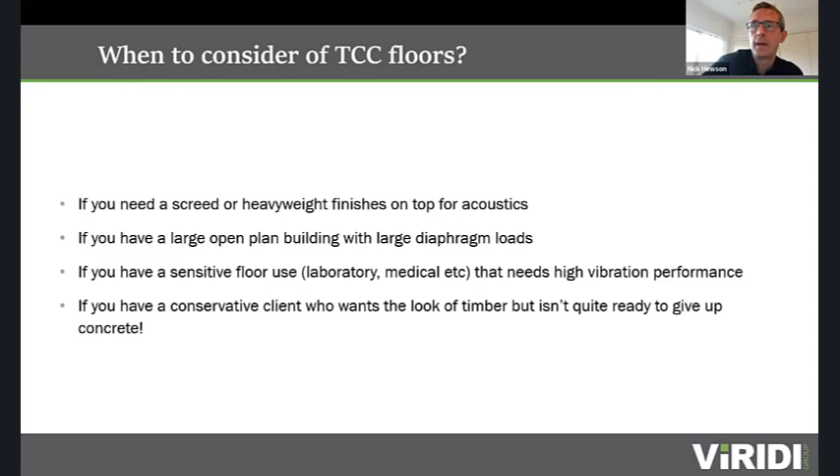In summary, concrete can complement timber and make up for a lot of the natural deficiencies in performance. The two materials can work hand in hand. There's plenty of technical information out there for those who want to explore the options. We're certainly happy to talk to people about the strong floor, and again, try to download those Wood Solutions guides if you want to understand more.

I think TCC has the potential to unlock projects that pure mass timber structures may not be able to touch - it may be a long span requirement, or the height of the building may make it challenging from a fire engineering perspective. These systems could help to balance that. We're not here to try to take market share away from mass timber, but the systems and ideas can sit alongside each other.

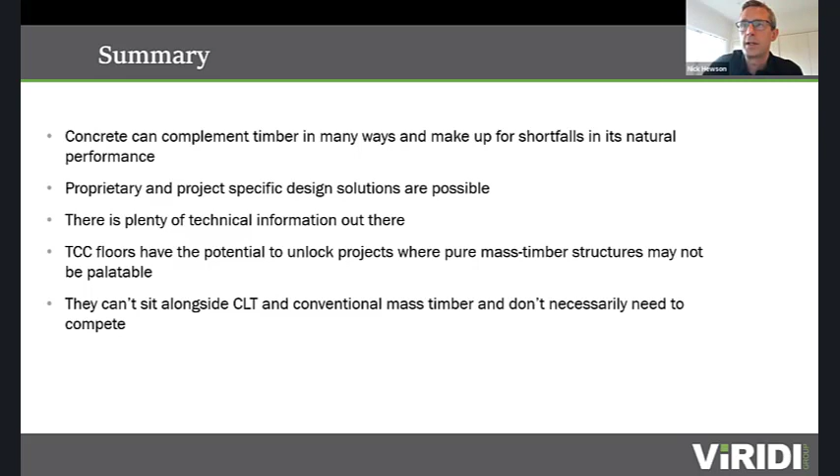So look, we're probably running out of time for questions. That's the end of my presentation, so thanks for listening.